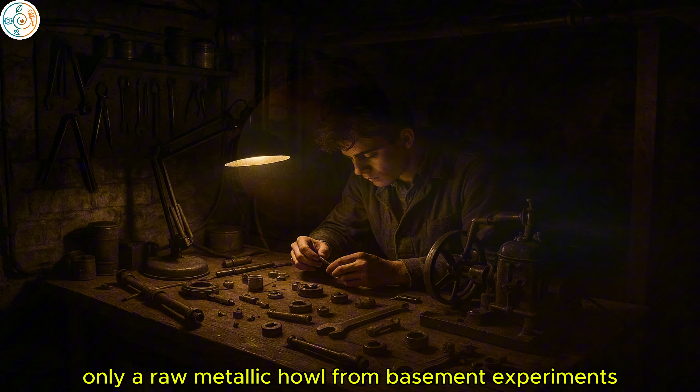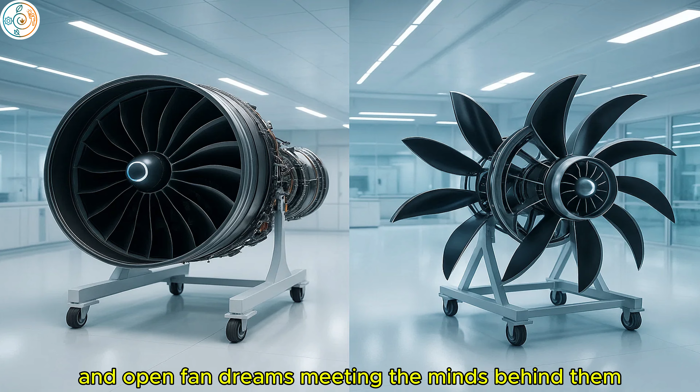Picture August 27, 1939. A stubby jet prototype rises without a propeller, only a raw metallic howl. From basement experiments to engines that swallow cities of air each minute, how did we teach fire to fly? In this series opener, we'll trace jet engines from bench rigs to today's geared giants and open-fan dreams, meeting the minds behind them and the moments that changed everything. So you can guess what's coming next.

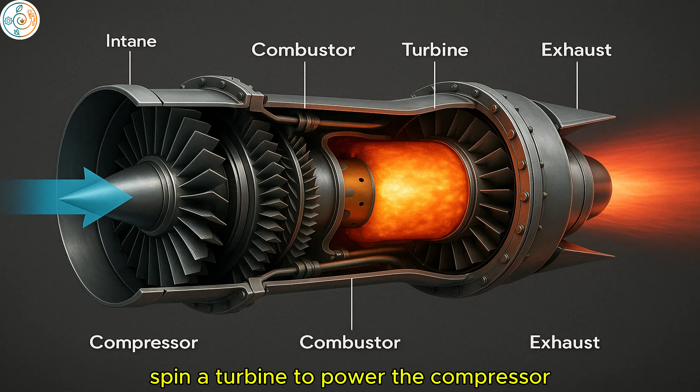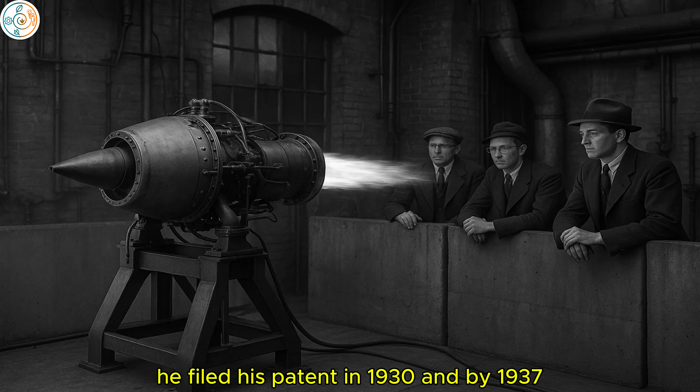In the late 1920s, a young Royal Air Force cadet named Frank Whittle sketched a radical idea. Forget propellers. Compress air, ignite fuel, spin a turbine to power the compressor, and let the hot stream push the aircraft forward. He filed his patent in 1930, and by 1937, his compact centrifugal turbojet roared on a test stand.

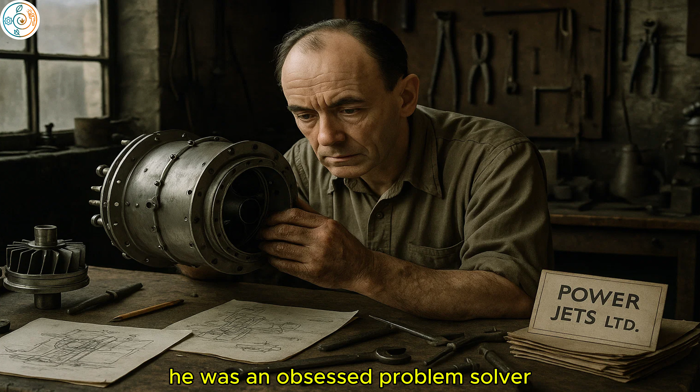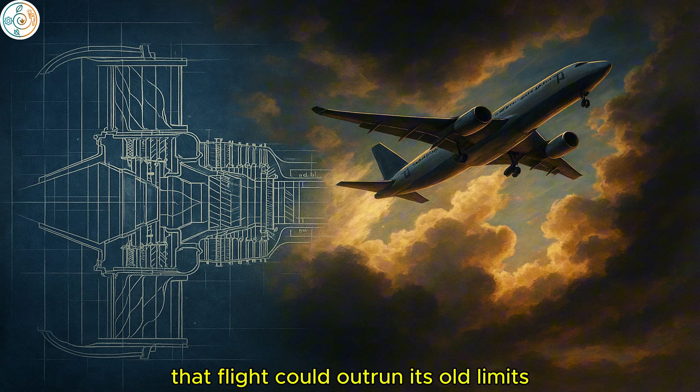Whittle wasn't a corporate titan. He was an obsessed problem solver, scraping resources to found Power Jets and prove that a continuous, high-speed airflow could do what pistons and props could not. His personal arc, working-class roots, dogged persistence, and a thesis dismissed as fanciful, gives the technology a human heartbeat. He wasn't just inventing hardware, he was inventing confidence that flight could outrun its old limits.

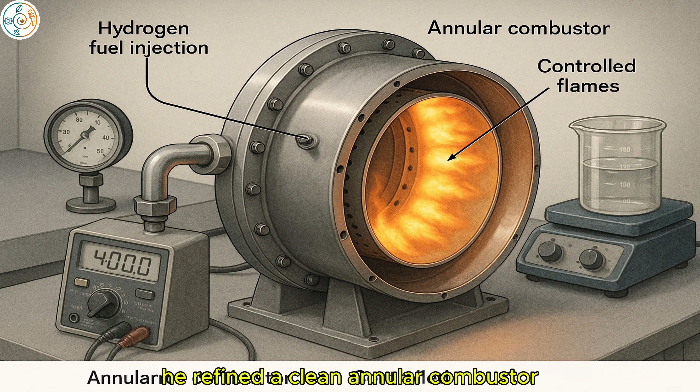Meanwhile, in Germany, physicist Hans von Ohain pursued the same dream from a different angle. Backed by industrialist Ernst Heinkel, he refined a clean annular combustor and experimented with hydrogen to tame early combustion instability. On August 27, 1939, his HeS-3B powered the Heinkel He 178 into the history books, the first jet flight. Where Whittle's centrifugal compressor prized simplicity and ruggedness, Ohain's work foreshadowed sleek axial designs. Two young minds, two paths, one breakthrough. Jets had arrived.

The jet engine's roots are older than flight. In 1791, John Barber outlined a gas turbine concept: compressor, combustor, turbine. But metallurgy and sealing couldn't deliver the needed pressures or temperatures. In 1903, Ægidius Elling finally produced net power from a small gas turbine using a centrifugal compressor, proving the thermodynamic loop could work. These were seeds, not airplanes, but they framed the cycle every modern jet still follows: compress, burn, expand. Then manage heat and losses well enough to make useful thrust.

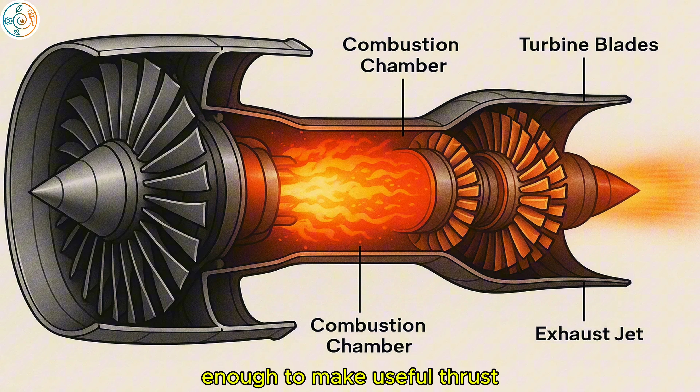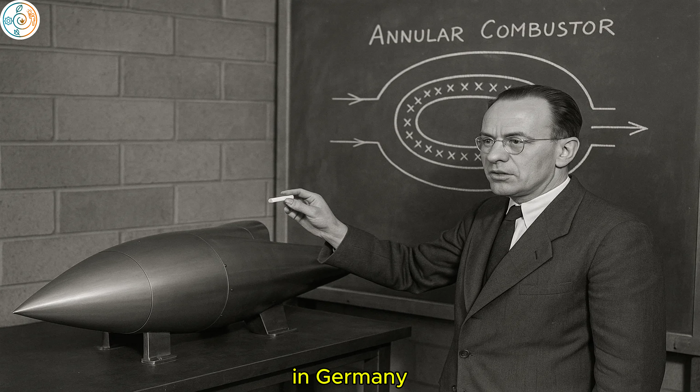The first practical aircraft turbojets emerged in parallel. In Britain, Frank Whittle championed a compact centrifugal compressor that could be built with the machine tools of the day. In Germany, Hans von Ohain leaned toward cleaner aerodynamics and an annular combustor. Whittle's engine ran on a stand in 1937. Ohain's HeS-3B flew in 1939 on the Heinkel He 178. Both solved the same puzzle: keep air flowing smoothly through a compressor, add fuel without blowing out the flame, extract enough turbine power to sustain the compressor, and leave a high-velocity exhaust to push the aircraft forward.

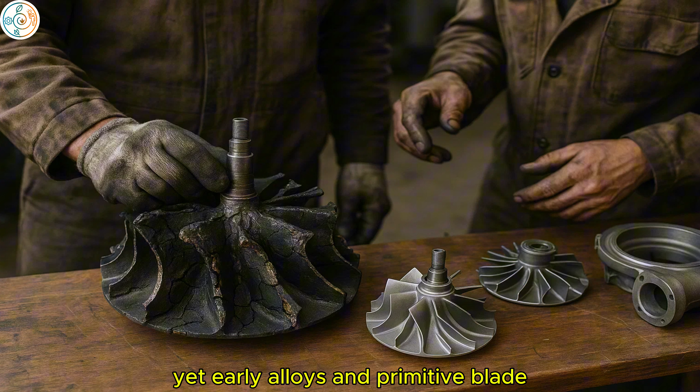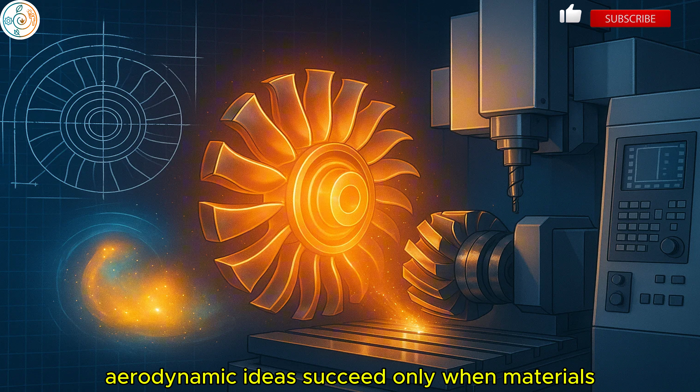War accelerated everything and exposed limits. The German Jumo 004, an axial flow turbojet, powered the Me 262 to unprecedented speeds, while Britain's Gloster Meteor introduced jet operations to the RAF. Yet early alloys and primitive blade cooling meant short service lives and frequent overhauls. The lesson stuck. Aerodynamic ideas succeed only when materials, cooling, and manufacturing keep pace. That insight, more than any single blueprint, set the trajectory for the next 80 years.

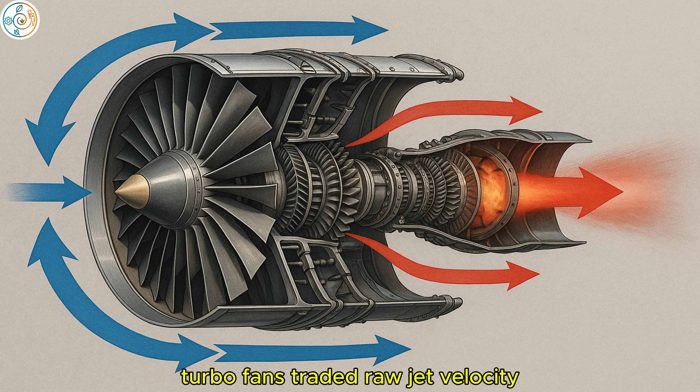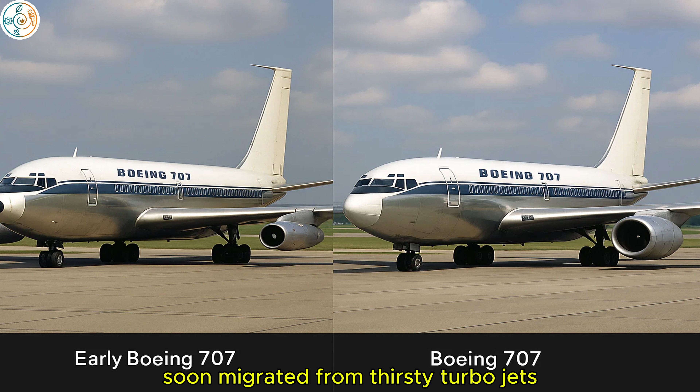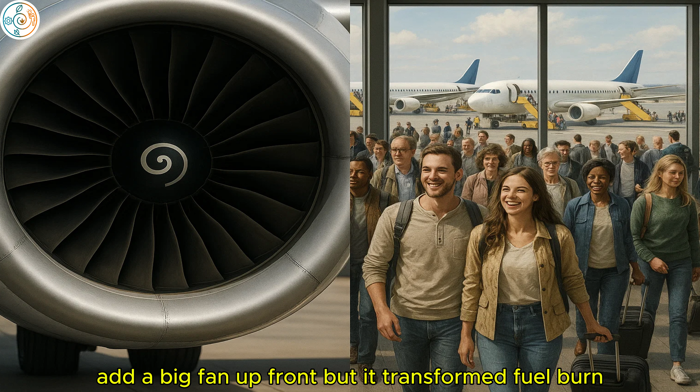After the war, turbojets matured for speed, but airliners needed range and economy. Enter the turbofan. By routing a large cold stream of air around the hot core, turbofans traded raw jet velocity for propulsive efficiency at subsonic cruise. Rolls-Royce's Conway proved the concept in service. Boeing's early jets soon migrated from thirsty turbojets to mixed flow and then high bypass turbofans. The change looks simple on paper, add a big fan up front, but it transformed fuel burn, noise, and the economics of global travel.

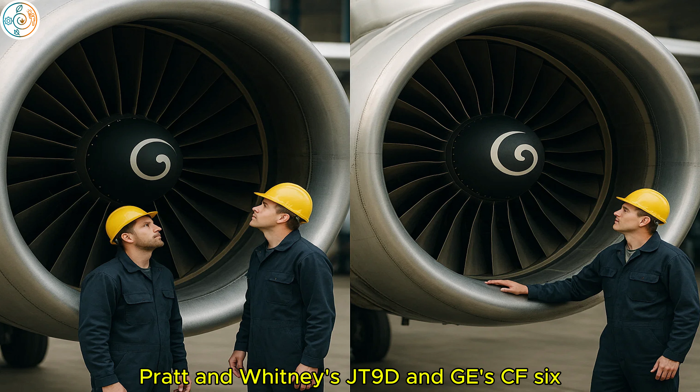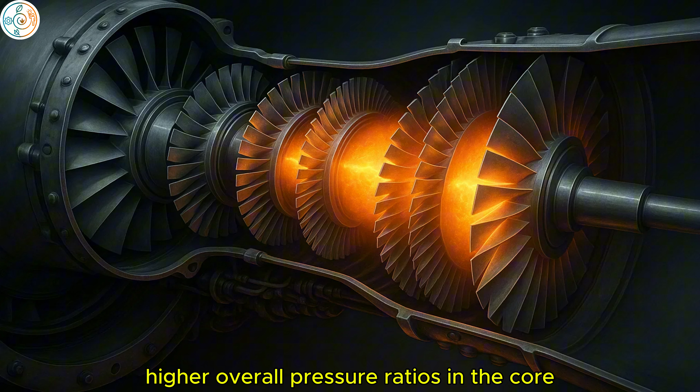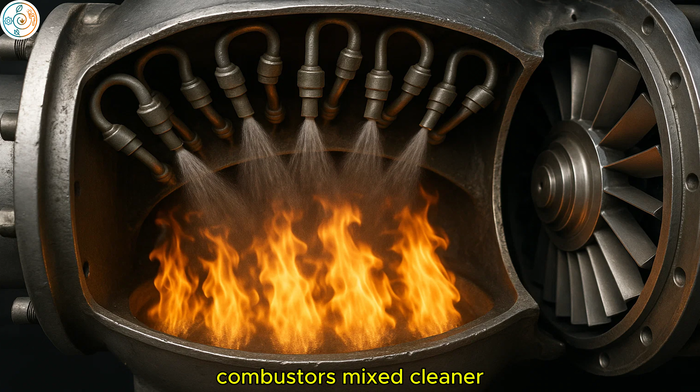The wide-body era amplified the idea. Pratt & Whitney's JT9D and GE's CF6 swung ever larger fans and higher bypass ratios, letting aircraft like the 747, DC-10, and A300 carry more people farther on less fuel. Higher overall pressure ratios in the core squeezed more work from each kilogram of air, while multi-stage compressors with smart variable stators kept the operating map stable across throttle settings. Fuel nozzles atomized better, combustors mixed cleaner, and turbines extracted power with fewer losses.

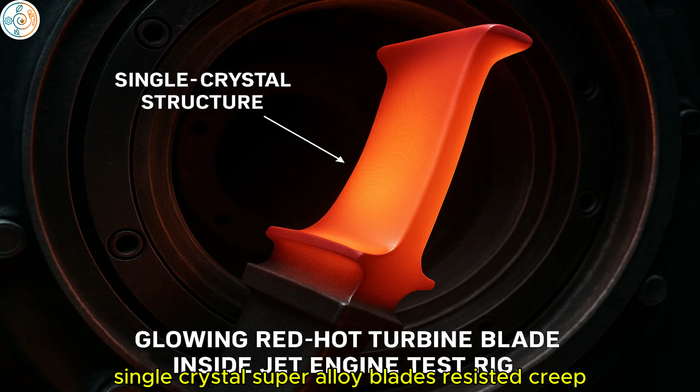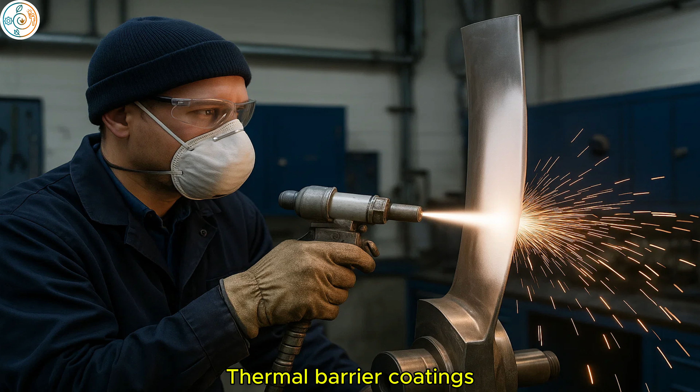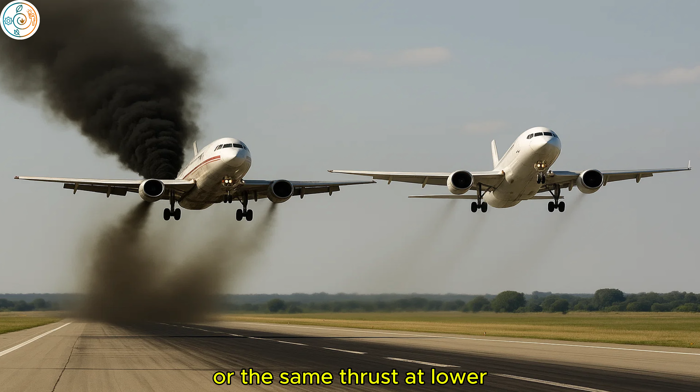Materials quietly became the star. Single-crystal superalloy blades resisted creep at searing temperatures. Internal serpentine passages and film cooling bled just enough air to shield metal surfaces. Thermal barrier coatings added precious degrees of margin. Each incremental step raised turbine inlet temperature and core pressure ratio, unlocking either more thrust or the same thrust at lower specific fuel consumption. Durability followed. Where early engines survived tens of hours, modern commercial turbofans routinely run thousands between shop visits.

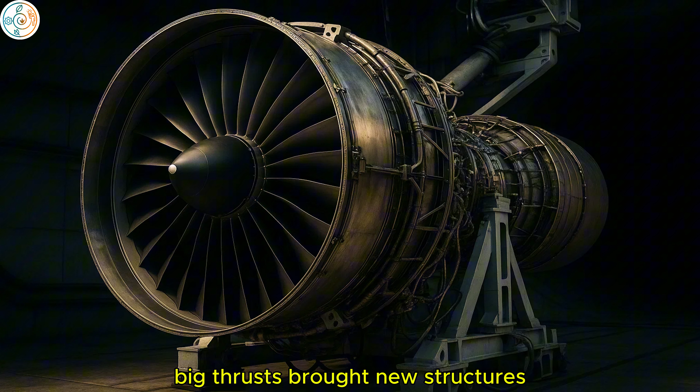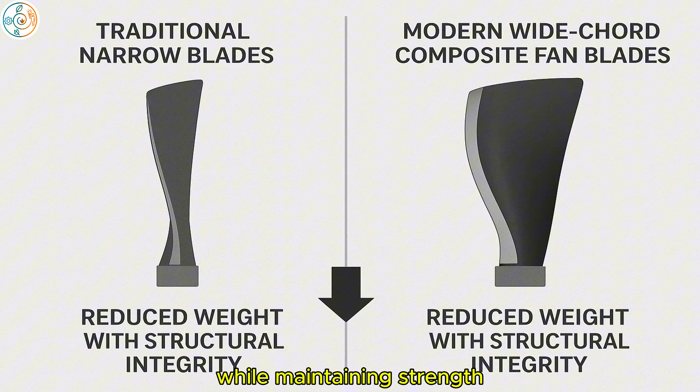Big thrusts brought new structures. The GE90 family showcased carbon fiber composite fan blades and wide-chord aerodynamics that shed weight while maintaining strength. Larger fans also meant lower exhaust velocities and less community noise, a win for both neighbors and airlines. Serrated nozzle chevrons and acoustic liners further tamed the roar by mixing shear layers and absorbing tonal peaks, making high-bypass engines not just efficient, but civil.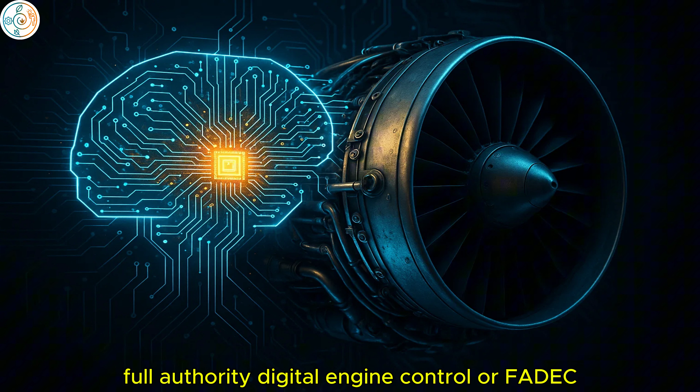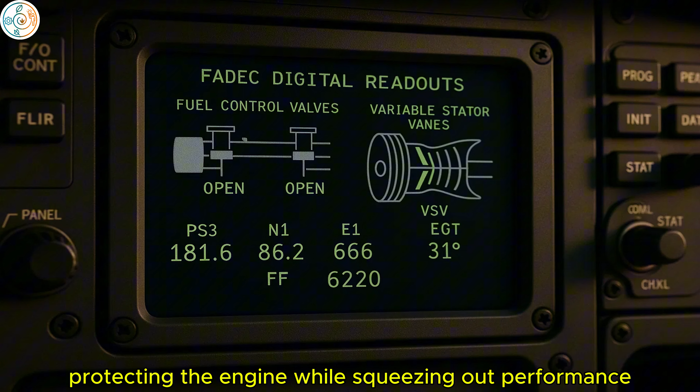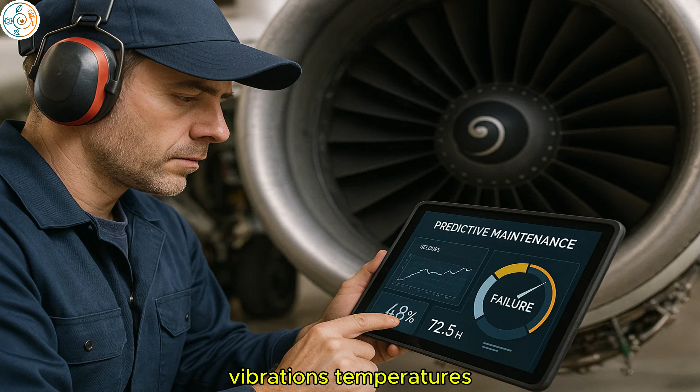Digital brains sharpened analog muscles. Full-authority digital engine control, or FADEC, tuned fuel flow, variable geometry, and clearances in real time, protecting the engine while squeezing out performance in hot and high conditions. On-condition monitoring and big data analytics turned maintenance from reactive to predictive. Vibrations, temperatures, and pressure ratios became early whispers of wear, reducing unscheduled downtime and cost.

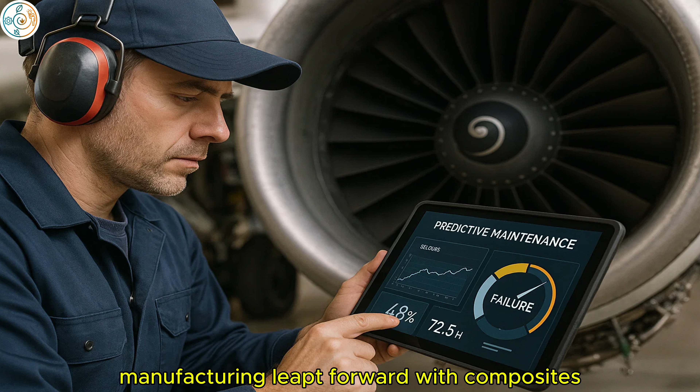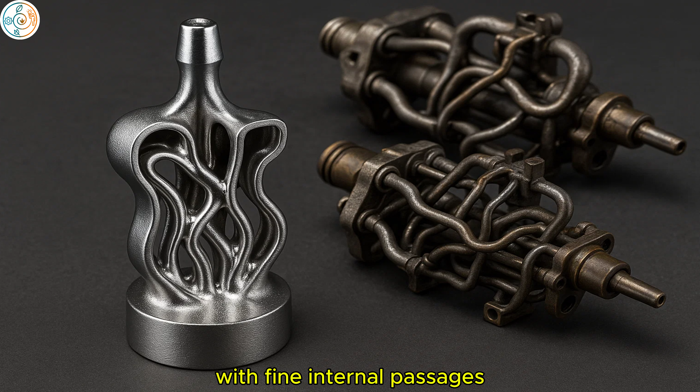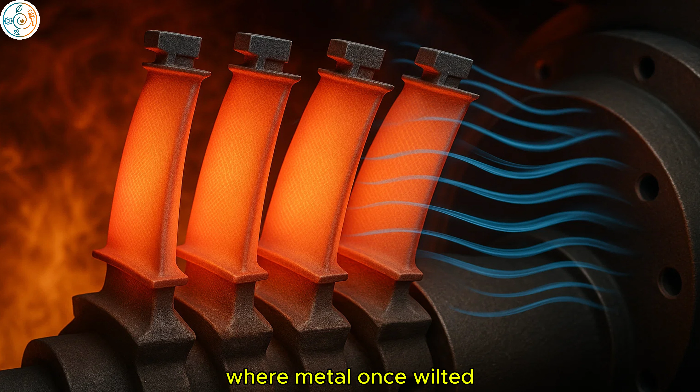Manufacturing leapt forward with composites and additive. 3D-printed fuel nozzles consolidated dozens of brazed parts into single pieces with fine internal passages, improving atomization and cutting weight. Ceramic matrix composites arrived in hot sections where metal once wilted, enabling higher temperatures with less cooling bleed. The cumulative impact is subtle but compounding. Every gram saved at the fan, every degree added at the turbine ripples through the cycle and the airframe.

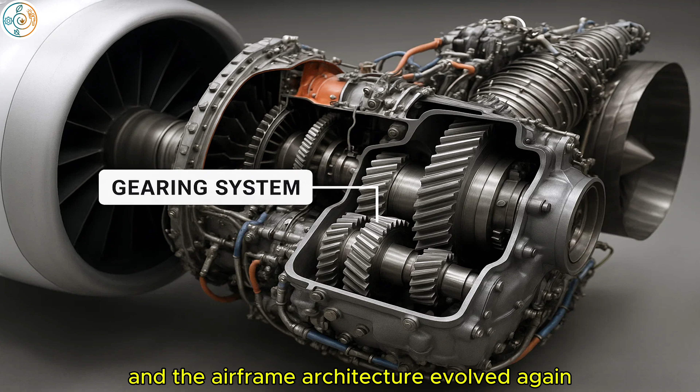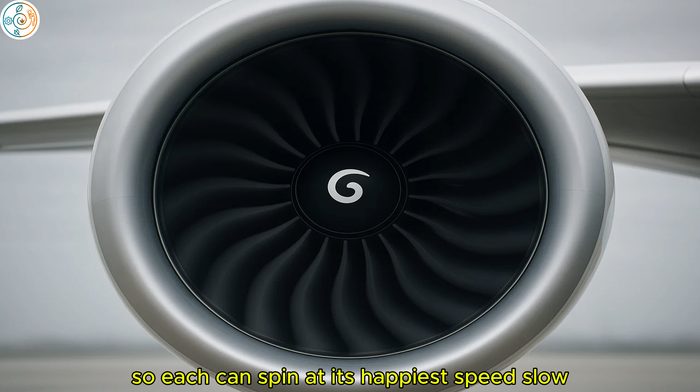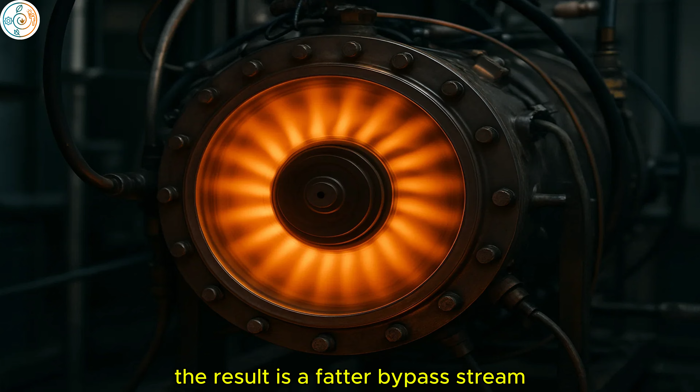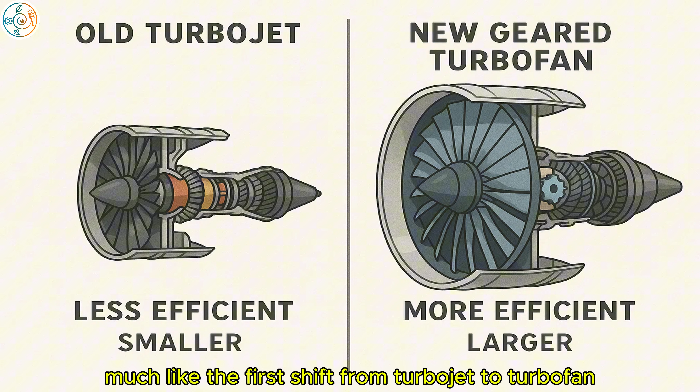Architecture evolved again with gearing. Pratt & Whitney's geared turbofan places a reduction gearbox between the low-pressure turbine and the fan so each can spin at its happiest speed. Slow, quiet, and efficient for the fan, fast, compact, and effective for the turbine. The result is a fatter bypass stream, improved propulsive efficiency, and the platform poised to benefit from future materials and combustor gains. It's a mechanical tweak with strategic consequences, much like the first shift from turbojet to turbofan.

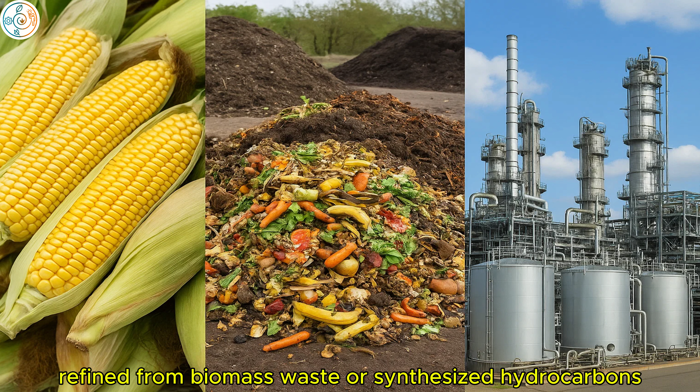Finally, fuel flexibility began moving from demonstration to deployment. Sustainable aviation fuels, drop-in blends refined from biomass, waste, or synthesized hydrocarbons, allow today's engines to cut life cycle emissions without redesign. They don't change how a turbofan works, but they change what flows through it.

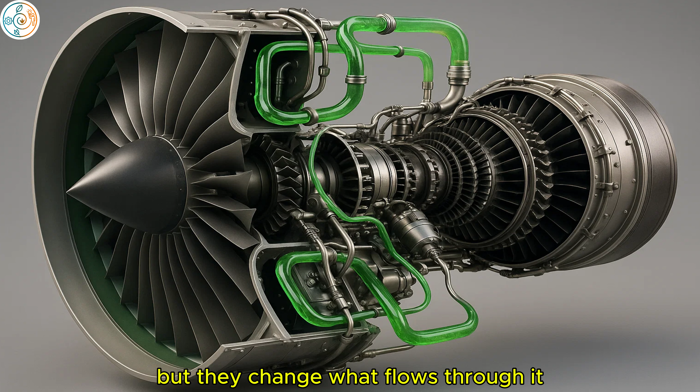Meanwhile, ambitious experiments, open fan propulsors that revisit the prop fan promise with better acoustics, hybrid electric assists for regional routes, and even hydrogen combustion probe the edges of what a jet can be. Each builds on the same disciplined choreography refined since Whittle and von Ohain: compress, burn, expand, recover, and keep pushing losses down.

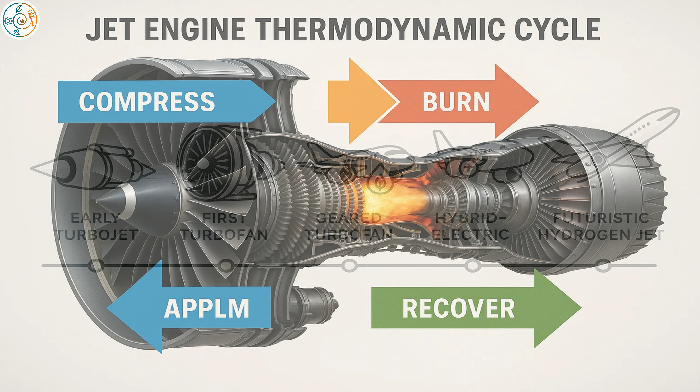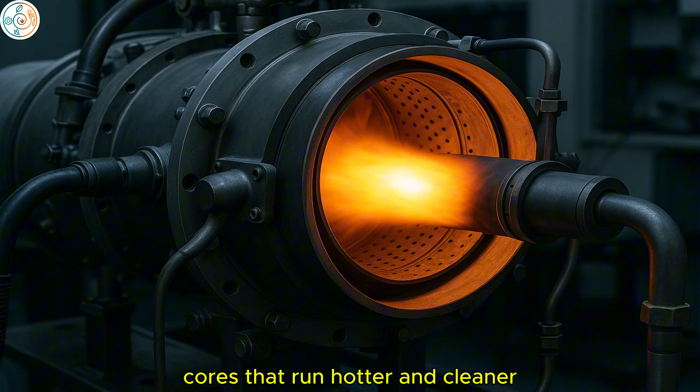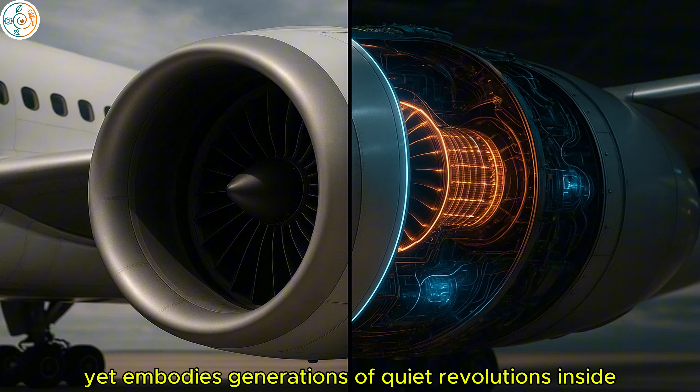Thread these milestones together and a pattern emerges. Progress in jet engines is less about singular eureka moments than about stacking compatible improvements. Fans that move more air gently, cores that run hotter and cleaner, brains that guard the hardware, and fuels that bend the carbon curve. The result is a machine that looks familiar from the outside, yet embodies generations of quiet revolutions inside. One of aviation's strangest twists is that a British engine helped define an early Soviet icon.

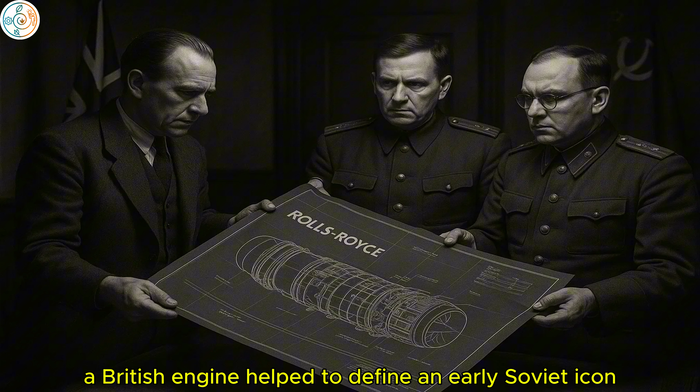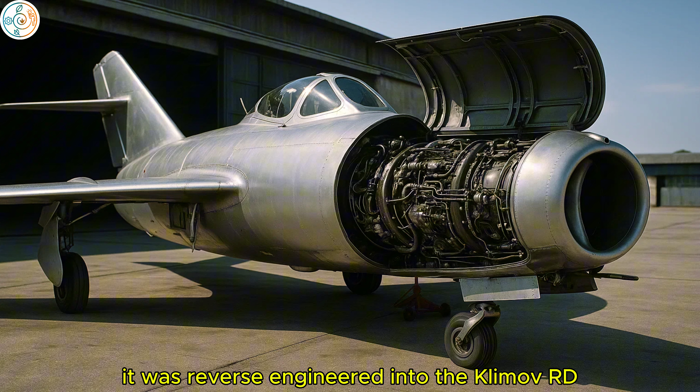After the war, Rolls-Royce sold its Nene turbojet to the USSR for civil use. Within a heartbeat, it was reverse-engineered into the Klimov RD-45 VK-1 that powered the MiG-15. East-West politics aside, the episode shows how quickly jet know-how could leap borders and front lines.

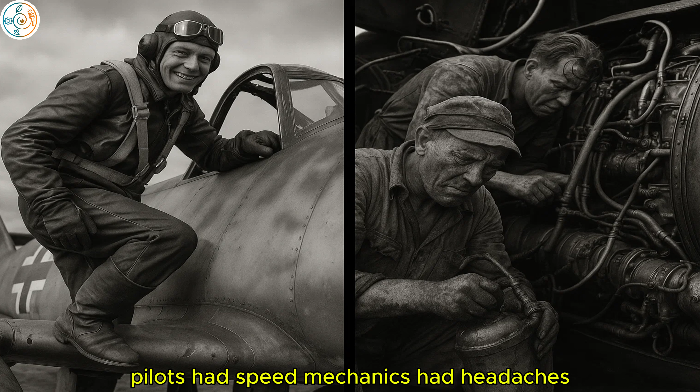Another shock was how fragile the first combat jets really were. The Me-262's Jumo 004 brought axial flow brilliance to the skies, but with limited nickel and immature cooling, many engines lasted mere dozens of hours. Pilots had speed, mechanics had headaches. The lesson that stuck for generations: metallurgy and cooling tech can win or lose entire eras.

America's jet chapter began with a quiet nudge. After seeing Whittle's work in Britain, U.S. General Hap Arnold rushed a crash program that produced the Bell P-59. It wasn't a world beater, but it trained pilots, seeded industry, and opened the door for the P-80 and the turbojet mainstream. Finally, the prop fan that almost changed airliners.

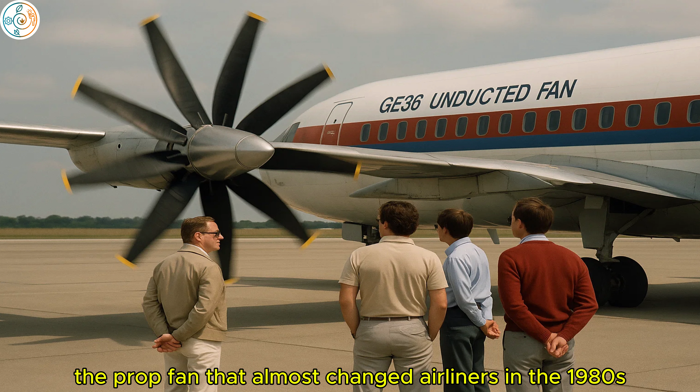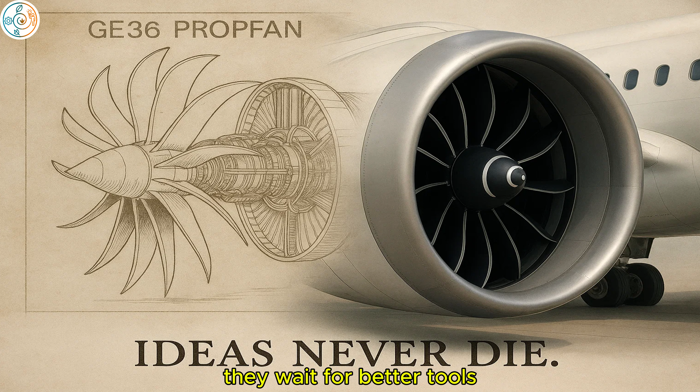In the 1980s, the GE-36's open rotors promised huge fuel savings, but stalled on noise and timing. Decades later, that DNA returns in modern open fan concepts, proof that ideas rarely die, they wait for better tools. The present is a stack of quiet revolutions. Geared turbofans let the fan loaf while the core sprints, squeezing more miles from every kilogram of fuel.

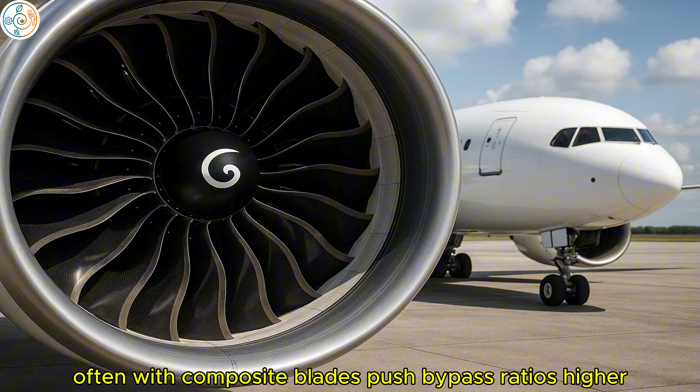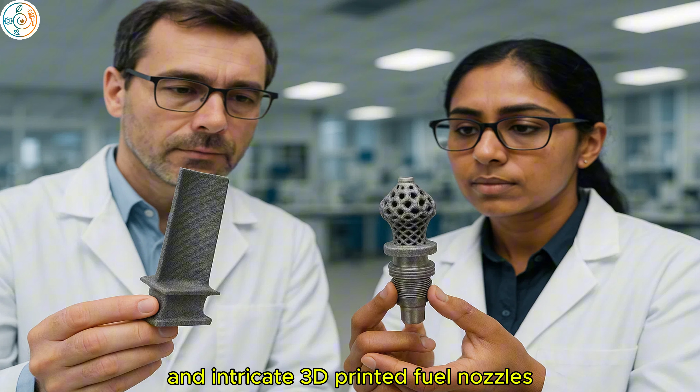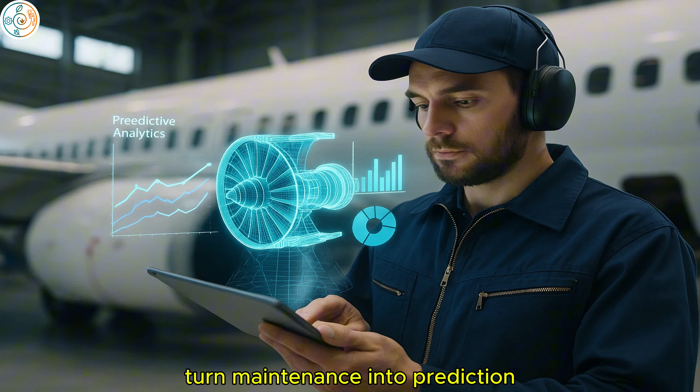Bigger, lighter fans, often with composite blades, push bypass ratios higher. Inside the hot end, ceramic matrix composites and intricate 3D printed fuel nozzles raise temperatures and finesse mixing, while FADEC plus digital twin analytics turn maintenance into prediction rather than surprise. The once shelved open fan is back with better tools.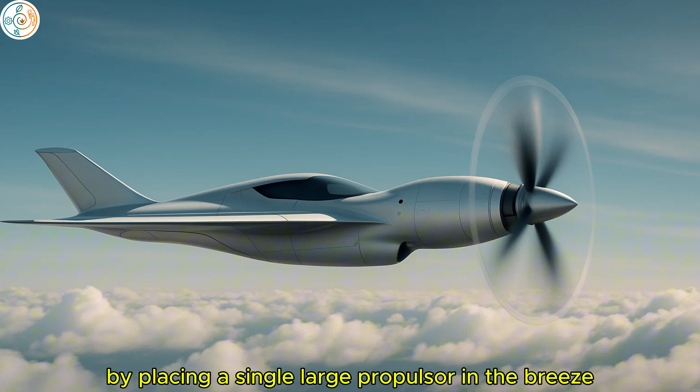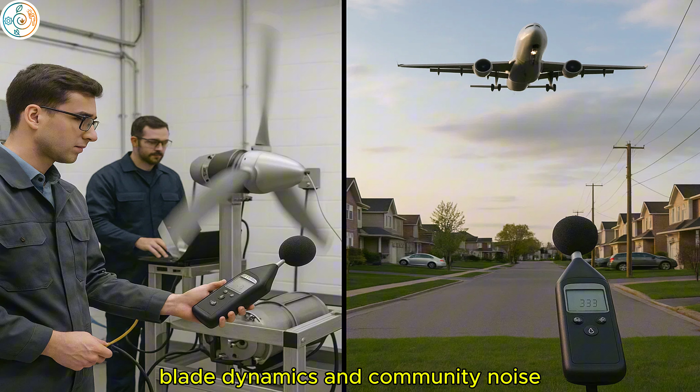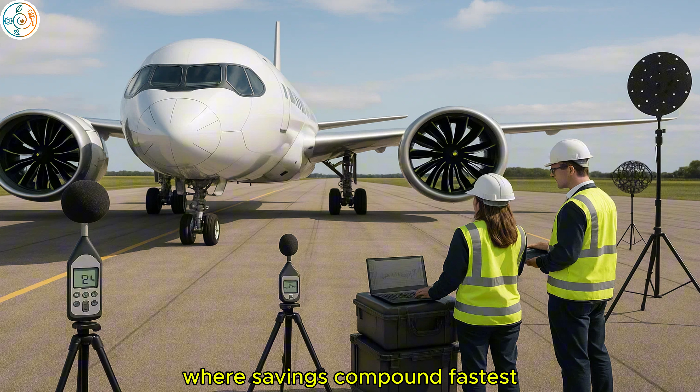By placing a single large propulsor in the breeze, sometimes unshrouded, designers chase double-digit fuel burn cuts. The trade-offs are certification, blade dynamics, and community noise. But with smarter acoustics and variable pitch, it could land first on single aisles where savings compound fastest. Hybrid electric architectures are moving from whiteboards to flying test beds.

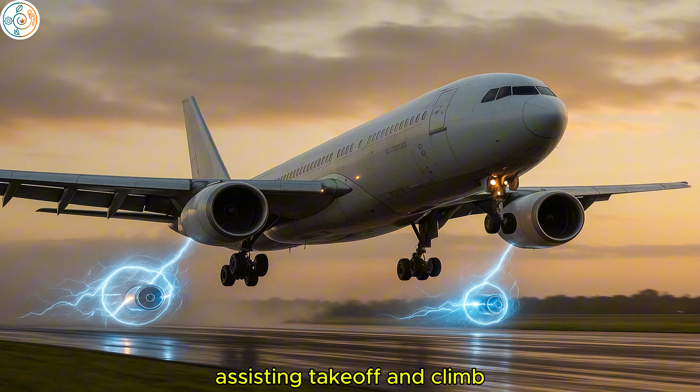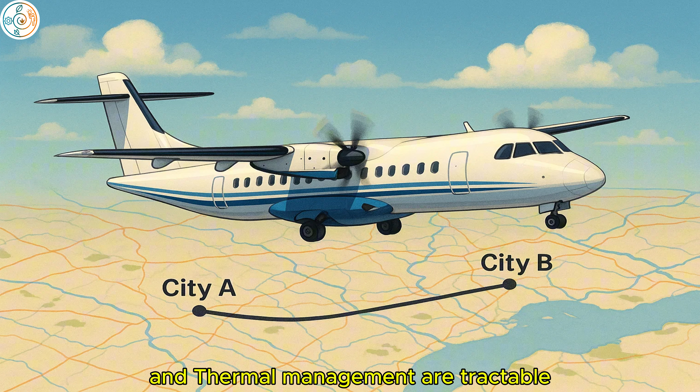Think megawatt-class electric machines assisting takeoff and climb, then idling while the gas turbine sips cruise fuel. The physics favors short-haul and regional routes, where battery mass and thermal management are tractable and quick turnarounds matter. Fuel is evolving too. Drop-in sustainable aviation fuels already work in today's engines, cutting life cycle carbon without redesign.

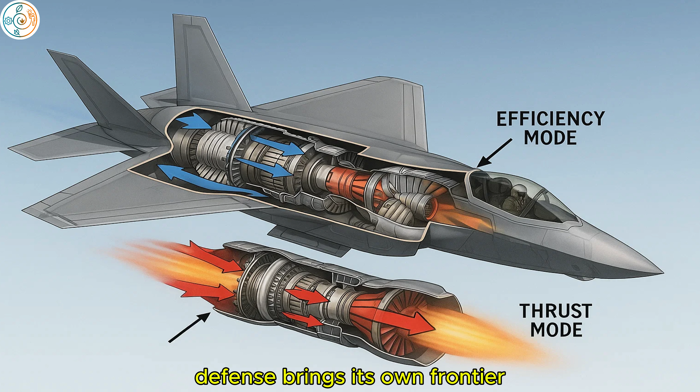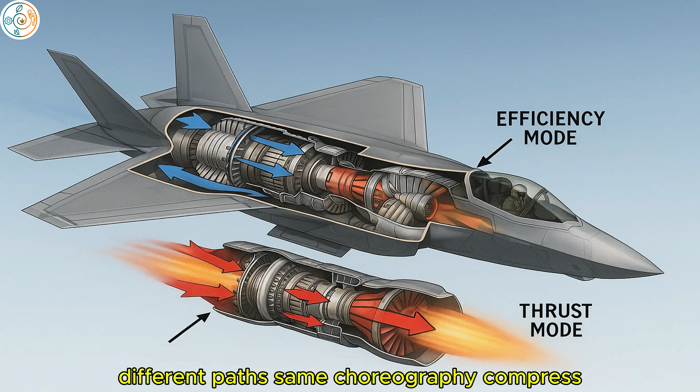Farther out, hydrogen promises zero carbon at the point of use, but demands cryogenic tanks, new airframes, and new airport plumbing. Defense brings its own frontier, adaptive cycle cores that can flow extra air for range one moment and switch to thrust the next. Different paths, same choreography. Compress, burn, expand, only cleaner, cooler, and smarter.

In barely a human lifetime, the jet engine leapt from benchtop curiosities to city-bridging machines. Yet its heartbeat never changed. Compress, burn, expand, then do it smarter. Each era stacked a different strength on that rhythm. Whittle's and von Ohain's faith in continuous flow.

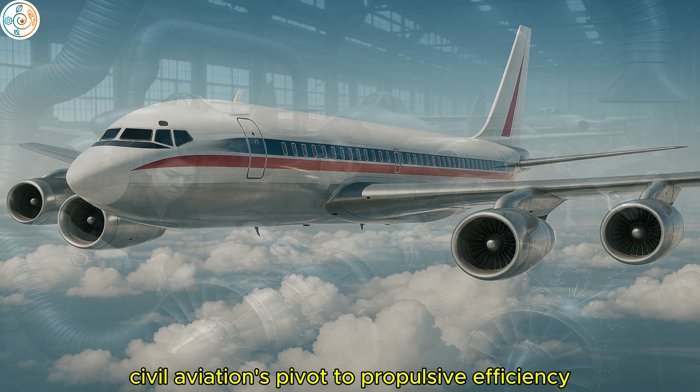Wartime lessons in materials and cooling. Civil aviation's pivot to propulsive efficiency. And today's marriage of composites, ceramics, and algorithms. The result is quieter cabins, longer ranges, and fuel bills that no longer dictate every route. Now the frontier shifts from how fast

to how clean. Open fans promising double-digit savings, hybrids that lend a shove at takeoff, and fuels from SAF to hydrogen that reorder the carbon math. We solved speed. We're engineering stewardship.

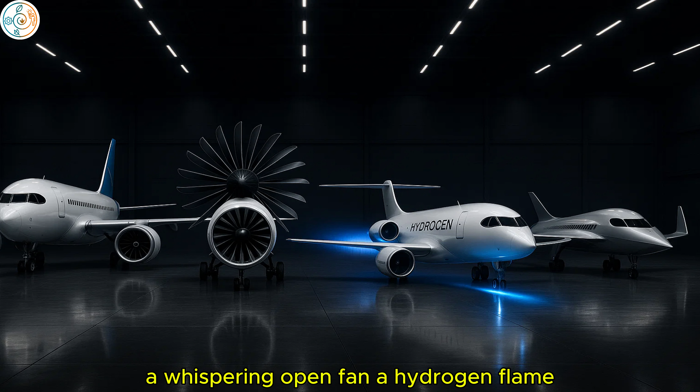So here's the question to carry forward. Will the next big step arrive as a geared giant, a whispering open fan, a hydrogen flame, or an elegant hybrid we haven't named yet? And how will it change where and how we fly?